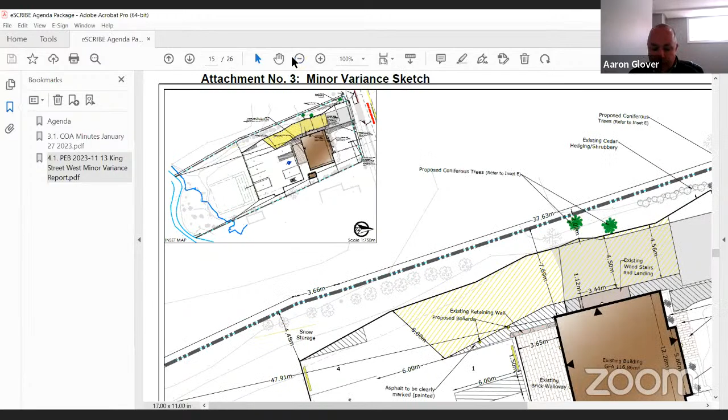So I understand that the privacy screening is requested on the eastern portion. Was there any thought or consideration to the western portion, if that's going to be impacted as well too? I noticed on the site plan that there was some suggested trees being put in. I guess is the assumption that that's going to provide an adequate buffer on the western portion?

Through you, Chairman Semple, to Member Glover. Yes, so there is an existing tree line along the west side of the parking lot. They are mature coniferous trees, so it does provide an existing buffer for the parking lot. Then there's some additional trees to be planted at the front, on the front west side of the property. You can see them on the site plan. So it was felt that the natural vegetated buffer provided adequate screening. We did not hear from the property owners on the west side of the property requesting any additional screening, but if that's something the committee feels is appropriate, it's something the condition could be amended to include the provision of privacy screening on both the east and west sides.

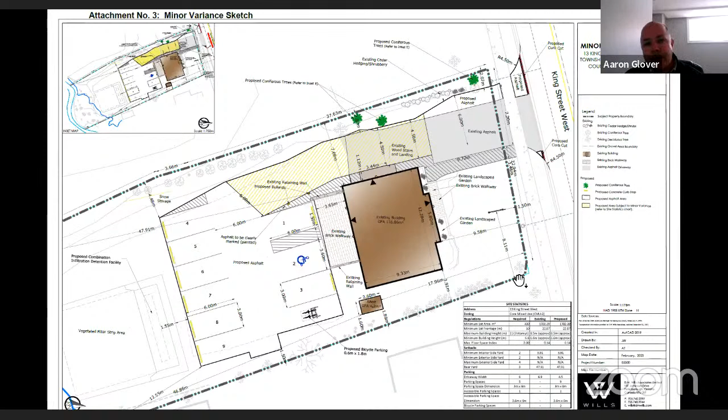Thank you, Karen. Any other questions or comments from members? I'll just add that you've sort of answered my question, as I wondered if there was any concern from the property owner to the west, but you've indicated you've not heard from them, so that answers that question. Thank you, Aaron.

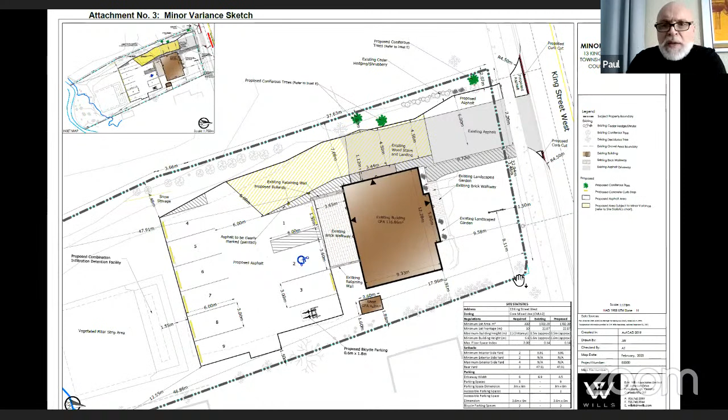Any other questions or comments from the members? Just Paul here, Mr. Chairman. I noticed that the property has two residential properties on either side of this proposal. I'm wondering if the fact that this is going to be a business and a health clinic, the amount of traffic, if that's been raised as a concern for neighbors, and it doesn't sound like it has been.

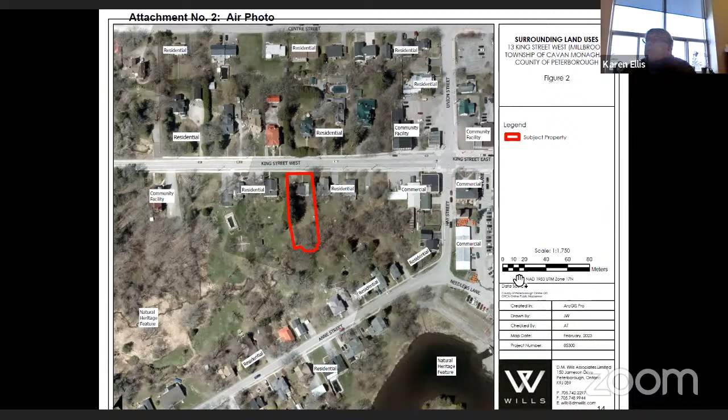Through you, Chairman Semple, to Member Paul: traffic has not been raised as an issue. A traffic brief has been provided to the township as part of the site plan approval process, which is being reviewed and considered by Peterborough Public Works Department.

I can tell you, just to fill out your local knowledge of what's happening in this neighborhood: at the time the township did their new official plan, we recognized that Millbrook itself is our primary business area, but the downtown is very small. There wasn't a lot of opportunity to provide additional space for business offices, medical clinics, small boutique kinds of things, restaurants. So at that time, through lots of public consultation and discussion, it was decided that we would expand the potential for some smaller scale commercial and institutional medical clinics, personal service shops, to expand into the western side of Hay Street, Union Street.

And so that area has been designated core, which means the range of uses is a little bit broader than strictly residential. So it was the intention of the township that you would see some transition of this area over time into having a little more business associated with it. So this, to be quite honest, is one of our first forays into seeing that official plan policy be implemented through zoning and a change of use. Okay, thank you very much.

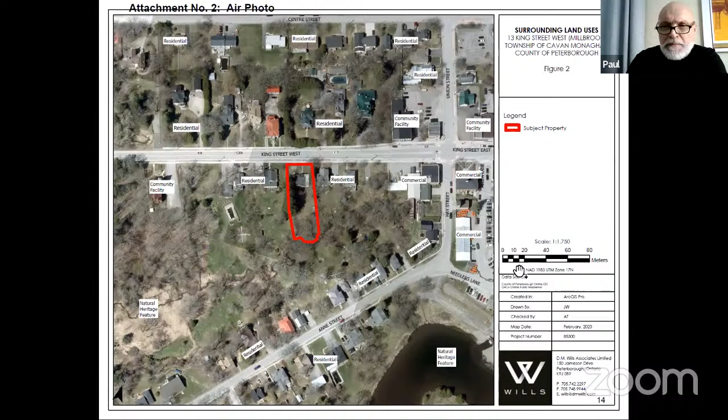Thank you, Karen. Any other comments or questions from the members? None? All right.

Just to clarify, if I understand it correctly, all we're being asked to do is approve the narrowing of the driveway. Everything else that they're proposing is already permitted. Is that correct? Through you, Chairman Semple, and members of the committee, that is correct. The variance applies to the width of the driveway only. Everything else complies with the zoning bylaw requirements in place today.

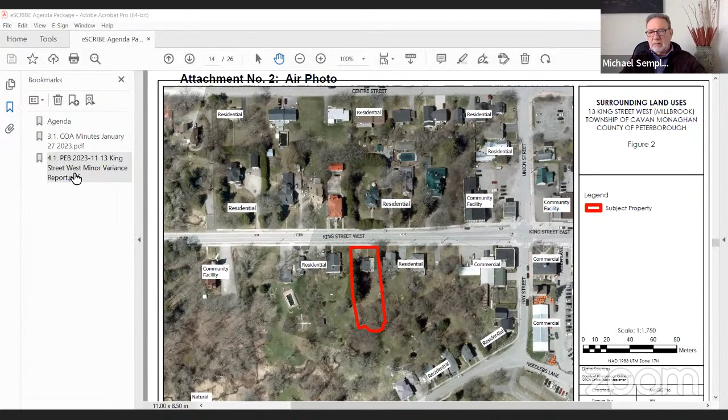Right, so the second item on the recommendations regarding the site plan, they would have to do that anyway, would they not? Yes, yes. All right, thank you very much.

Are there any other questions or comments arising from that from members? No? If not, then I would ask for a motion to approve the application with the... Excuse me, Chairman.

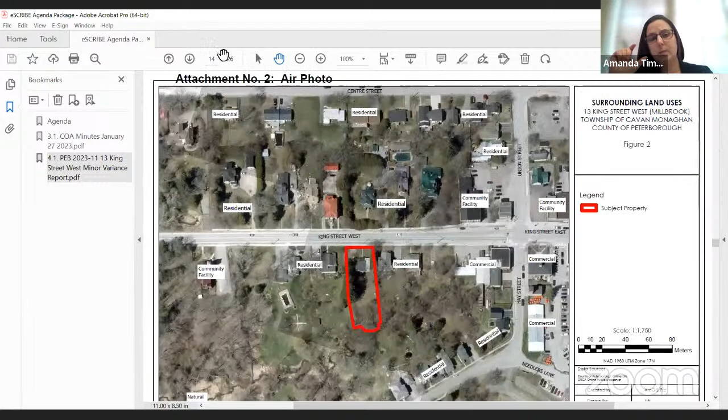I'm not sure if whoever's controlling things can pop up the site plan, just so we can see what I'm talking about. Right next to the building itself there's a little stairway that's an emergency exit out the side of the building. The main entrance will be to the rear, facing the parking lot.

So there won't be a whole lot of impact from the street. That's just the way we wanted to design that site, to make sure we keep those impacts down so the use is going to be compatible with the neighboring properties and existing uses there.

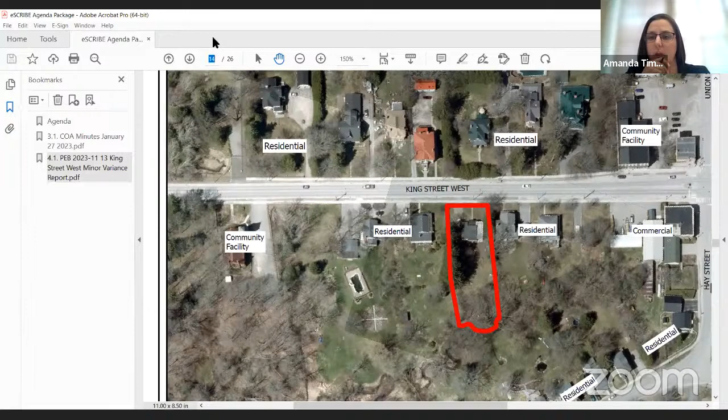The variance is just, can you put up the site plan, the one with the yellow? We've highlighted where the variance is in relation to the whole site and the alteration that's happening. So the parking lot is located to the rear, again to minimize impacts on the street, keeping access and lighting to the rear of the property so it's not impacting the sides with lighting. There was a question about that earlier.

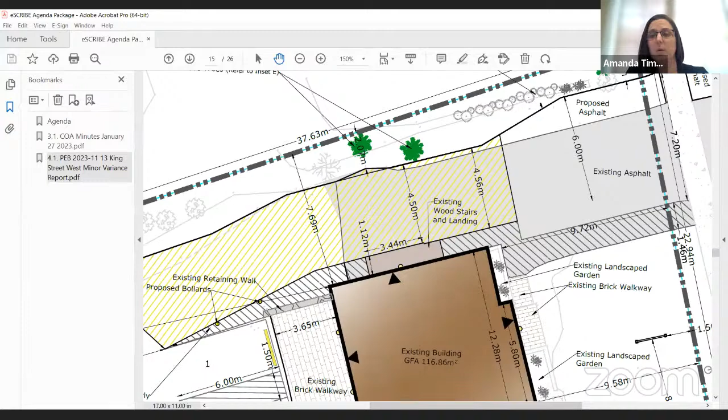So the 4.5 meters is really just beside the building, and then it widens out to 6 meters, and then the 7.2 meter requirement for the entrance onto the county road. Then again to the rear, down to that 6 meter point. There's quite a bit of grade there, so a significant amount of engineering went into designing the driveway and grades so water can flow properly without impacting the neighboring properties or the creek to the rear.

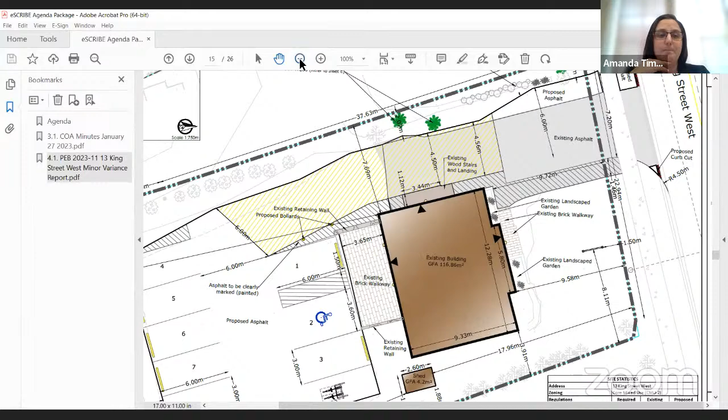A traffic study was also conducted to confirm the sizing and design of the entrance onto the county road. The study found that based on traffic counts for the proposed use, daily trips would be very minimal and not impact the street or neighboring properties. Because it's a clinic, it's not constant coming and going - it's fairly spaced out, with people having appointments and that kind of thing. We've taken all of that into consideration in the design.

We believe this really is a minor deviation from the zoning bylaw, given that everything else conforms with the zoning regulations, as well as the official plan policies and the intent of growing the downtown area with more mixed use along King Street on the way out of town. So it's our opinion that the proposed minor variance does meet those four tests you're tasked with satisfying under the Planning Act, as well as constituting good planning.

I do have some more information if the committee members have questions regarding the heritage aspects. I am a heritage planner working towards my designation as a professional heritage planner, so I have quite a bit of experience in terms of

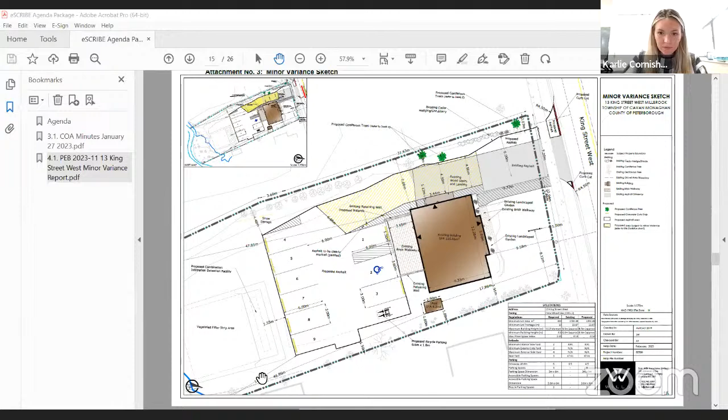Are there any other members of the public who wish to speak, Karlie? Through you, Chair, there is one more member of the public in attendance—if you wish to speak, please raise your hand. Amanda, I am going to move you back to an attendee. Through you, Chair, I am not seeing any more hands. Thank you very much.

That being the case, I would ask for a motion regarding this application to either approve or disapprove with the recommendations. I'll motion to approve with the conditions listed in the report. Aaron, a seconder? I'm happy to second. All in favor? Thank you—the application with the recommendations is passed. Thank you very much, everyone.